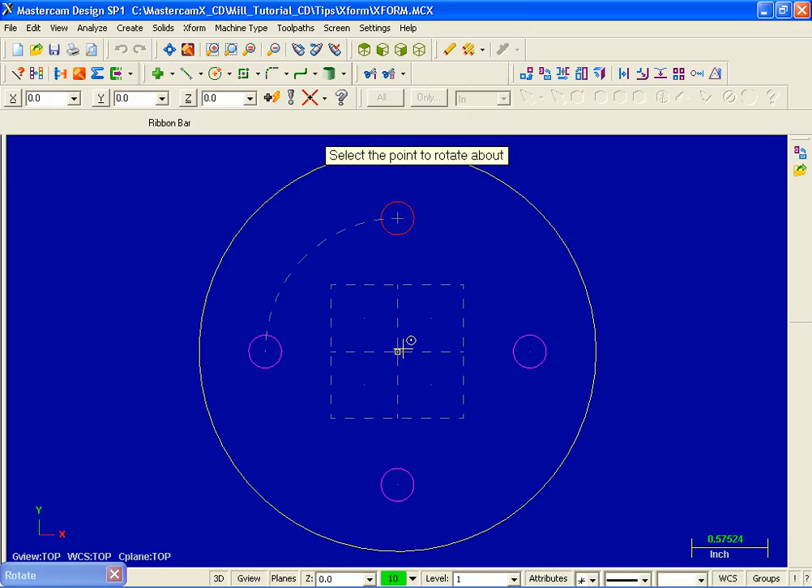Now we were doing a rotate where the center point was the origin, the x0, y0. Now if we have to pick another point, it's not a convenient situation like this where we have the center at x0, y0. Let's click on this button to define a new center point. Now the prompt, select the point to rotate about. As I move to the center of this arc, you can see there is a visual cue there that I'm going to snap to the center of this arc. So I'm going to pick it.

Everything's good here. I'm going to move on down to the bottom of this dialog box and hit the green check mark for OK. I'm just going to slide up now to the toolbar icon for clear colors and hit it. Now before we move back into Xform, what I'm going to do is undo this rotate operation. Now let's go into Xform, and the next thing that we're going to check out is Xform Mirror.

Now my first prompt is select entities to mirror. I'm going to pick this small circle, and that's it. To move on to the next stage, I'm going to move up to the right and click on the green button for end selection. Now what I'd like to do is mirror this small circle about the x-axis. Now moving up to the top of the mirror dialog box, the radio button is turned on for copy, so we're going to keep our original geometry, and what I'd like to do is mirror about the x-axis. So I'm going to turn this radio button on.

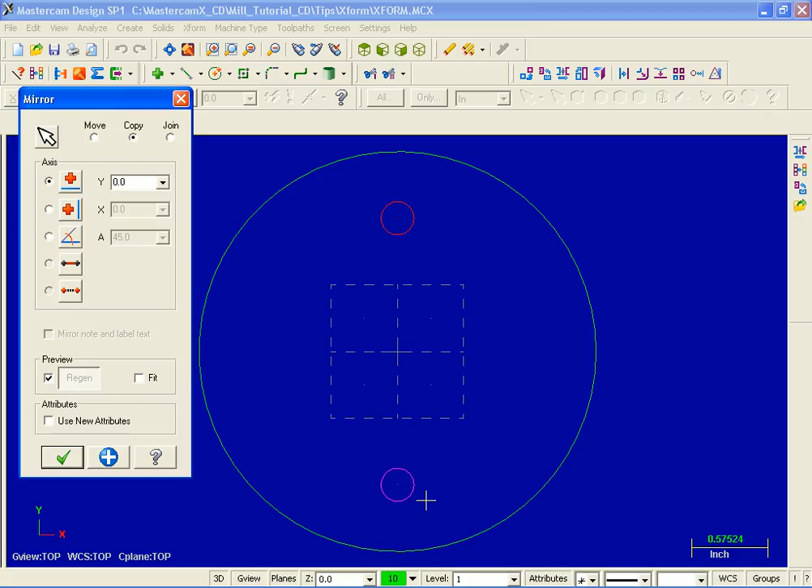Now just below, some of the other options are to mirror about the y-axis. Down below we can mirror about an angular axis. We can also select a line in the graphics window to mirror about, and at the very bottom we can mirror about 2 points. Now as my preview is turned on, you can see the result of this mirror operation, and everything looks good here. I'm going to go over back to the mirror dialog box and click on OK. Now before we move on to the next function, I'm going to hit undo.

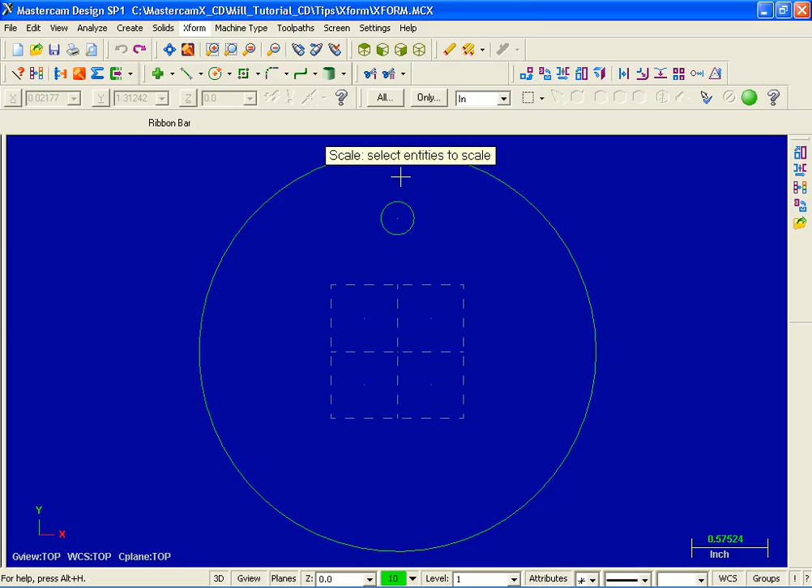Let's go into Xform, and this time I'm going to select Xform Scale. Now the first prompt, select the entities to scale. What I'm going to do is draw a window around these entities. So I'm going to pick a point and drag to the right and down and then pick. And as you can see, I've selected these 2 entities. Now let's move on to the next step. I'm going to pick end selection.

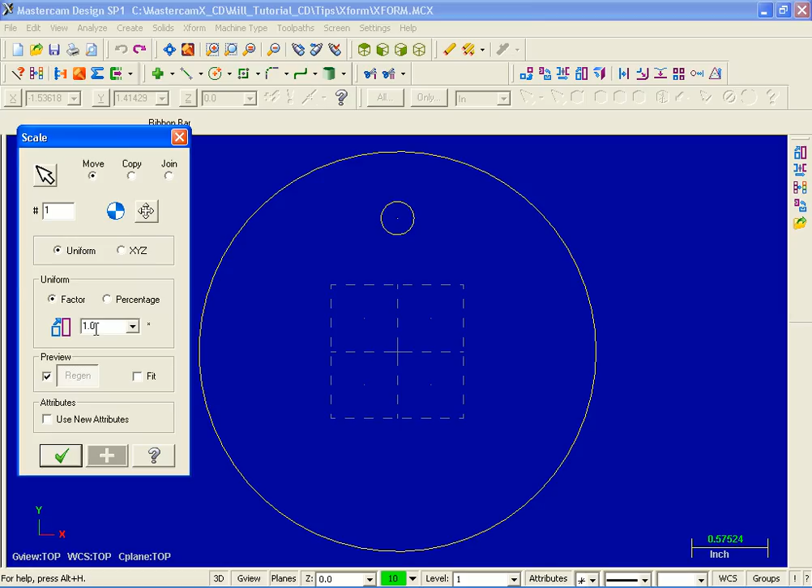Now over on the left in the scale dialog box, you can see we've got the radio button on for copy, to keep our original geometry. But what I'm going to do is slide off to the left and turn on move. I'm going to delete the original geometry. Now as we move down, we've got the number of items set to 1. I'm going to leave that as is, and down below in the scale factor we've got it set to 1. What I'm going to do is change it from 1 to 0.5, half scale, and then hit enter.

Now our preview is turned on, and on the right in the graphics window we've scaled down our geometry. I'm done here. I'm going to pick OK. I'm also going to move up and pick undo.

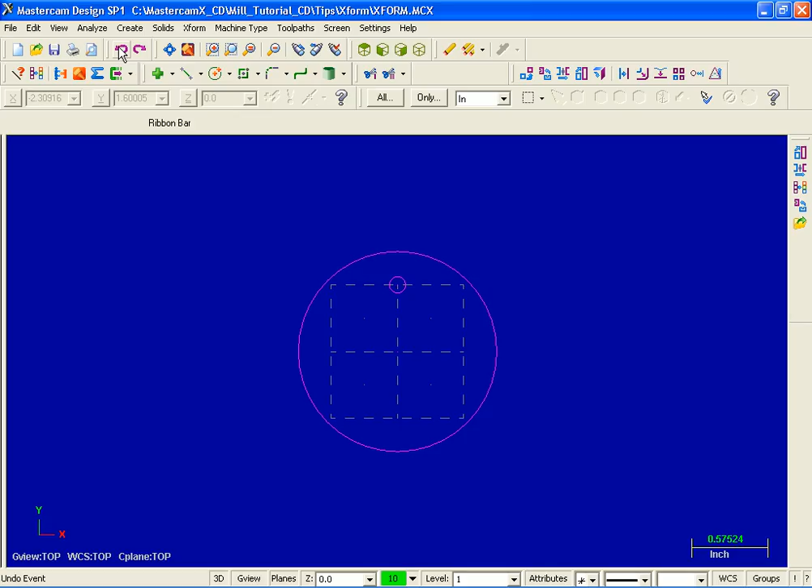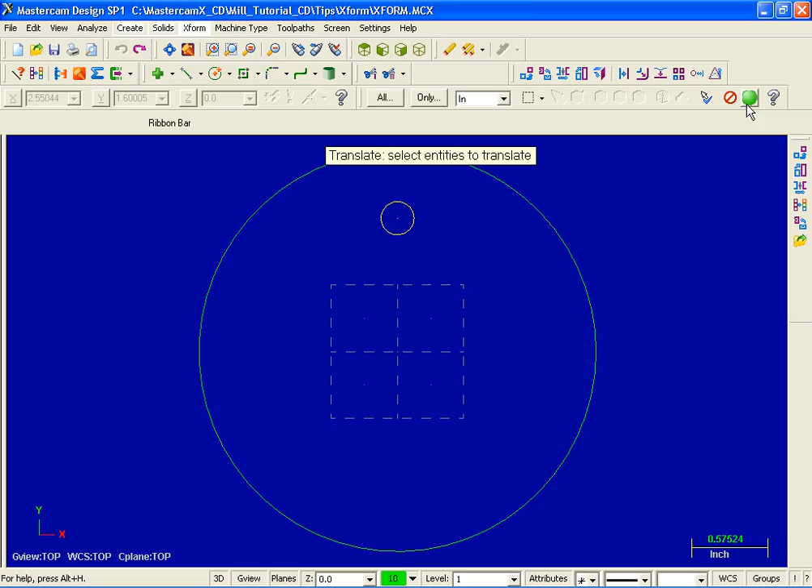Let's go back into Xform, and this time right at the very top we're going to check out Xform Translate. I'm prompted to select the entities to translate. What I'm going to do now is pick this circle. I want to move on to the next step. I'm going to click on End Selection.

Now over on the left, copy is turned on, so I'm going to leave that as is. Number of items we're going to copy is 1. Down below in the delta XYZ section, I'm going to click in this white space for the Y value and input -1 and then hit enter. Now as preview is turned on, you can see over in the graphics window I've just translated that circle down

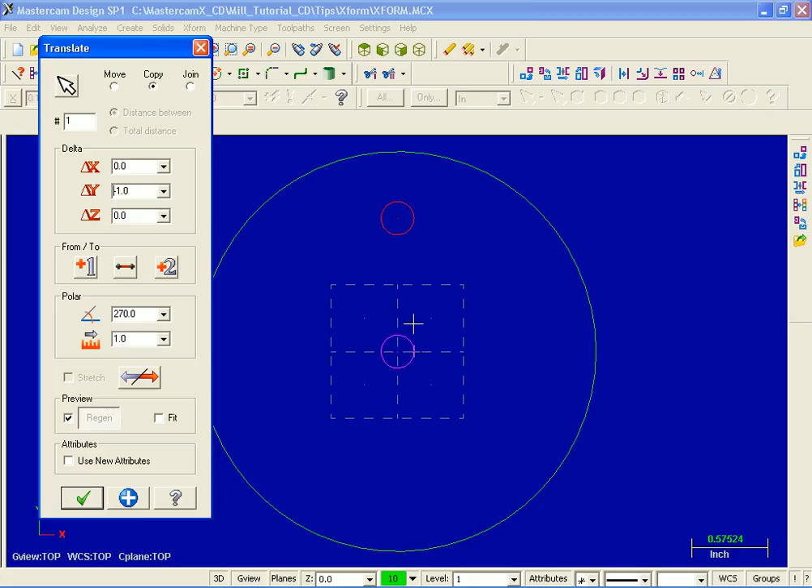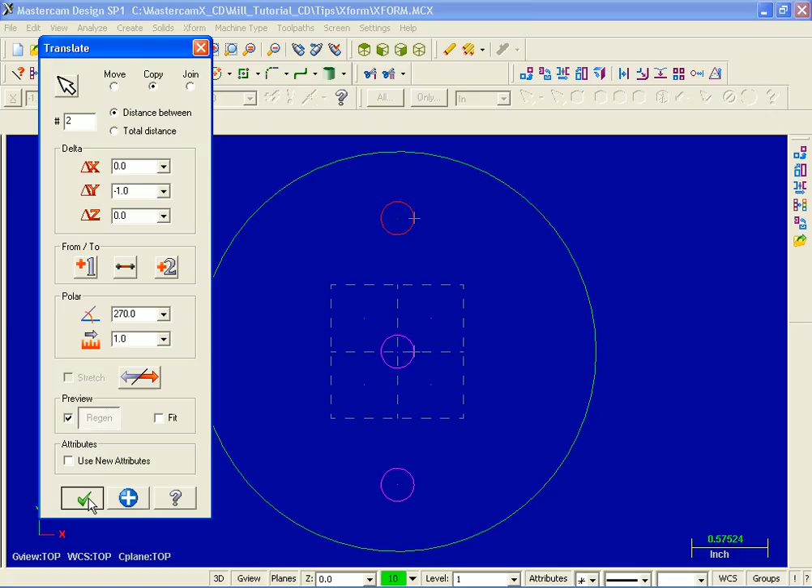in Y -1. Now let's move on back, and for the number of items I'm going to change that from 1 to 2 and then hit enter. So here's our second item, and these circles are 1 inch between centers. I'm finished here, so I'm going to click on OK. I'm going to also move up and do an undo.

Let's go back into Xform, and next we're going to check out Xform Offset. Now the first prompt, select the line, arc, spline or curve to offset. What I'd like to do is offset this arc, so I'm going to pick it, and the next prompt, indicate the offset direction. I can pick outside or inside, so I'm going to pick inside.

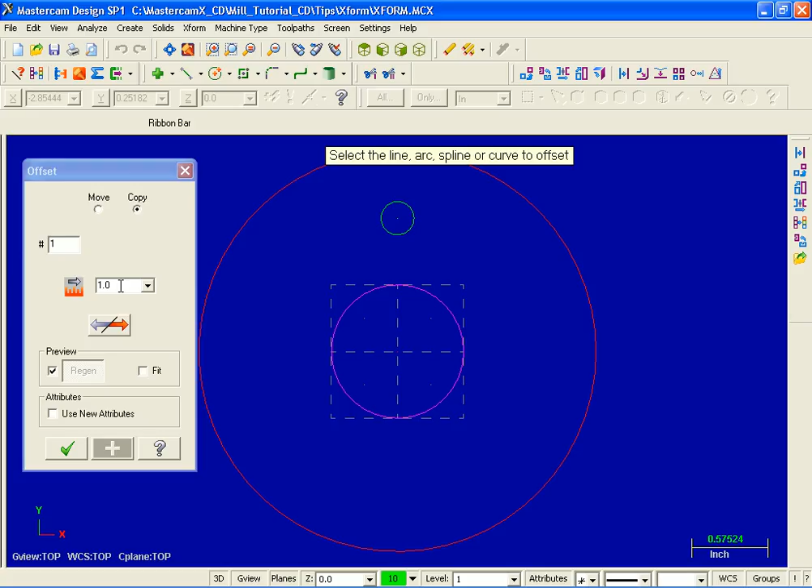Now if we move over to the left in the offset dialog box, the distance is presently set to 1 inch. That's our offset distance. I'm going to change it from 1 inch to 0.5 and hit enter. Now just below distance is the direction button. I'm going to pick on it, and as you can see it's flipped over to the other side. I'm going to hit it again, both sides, and I'm going to hit it one more time.

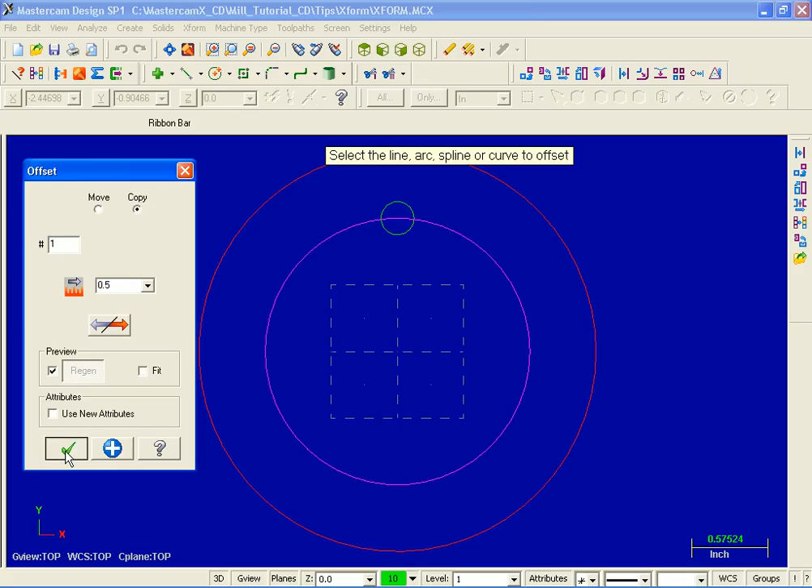So the distance, the offset distance, is 0.5. I'm done here, so I'm going to pick OK. I'm also going to go up and do an undo, and just slide off to the right and click on Fit. Now I'm just rotating the wheel on my mouse.

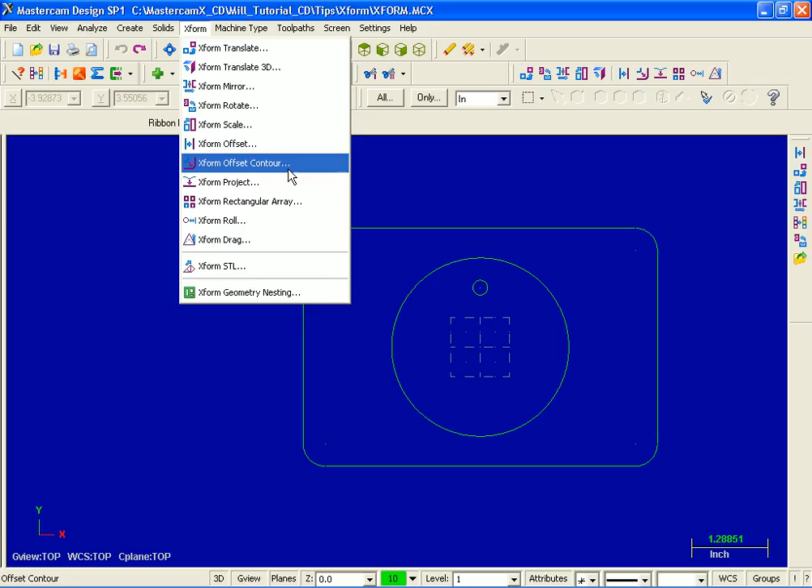Let's go back into Xform, and we're going to check out Xform Offset Contour. Now the first prompt, select chain 1. What I'm going to do is select this horizontal line. I'm going to pick it, and as you can see highlighted in yellow, it's successfully chained the geometry. I'm finished here, so I'm going to move over to the left. At the bottom of the chaining dialog box I'm going to pick on OK.

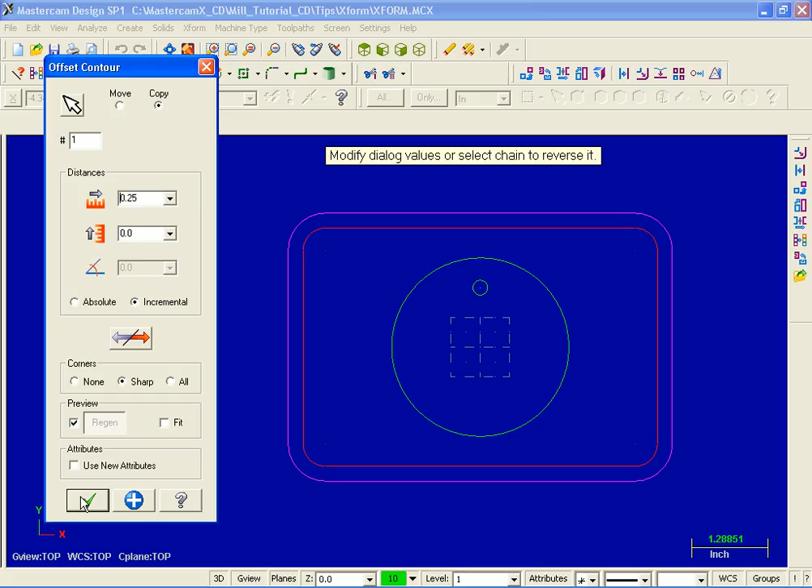Now at the very top we have the radio button turned on for copy. I'm going to leave that as is. As we slide over to the left, the number of items we're going to copy is set to 1. Now down in distance it's set to 0.5. I'm going to change that to 0.25 and hit enter, and as you can see there's our new magenta chain with the offset at 0.25. I'm going to pick OK and then move on up and do an undo.

Let's go back up into Xform. The last thing that we're going to check out here is Xform Drag. Now I'm prompted, select entities to drag. Well, what I'm going to do is move on up and open up this drop down and pick window, and if I just slide to the left and open up this drop down, I'm going to pick in plus. Now Window In Plus selects entities that lie completely inside and entities that intersect the window.

So what I'm going to do is draw a window starting here and then moving on down to the right and pick a point here. And as you can see, it's picked these entities highlighted in yellow. Now to move on to the next stage, I'm going to click on End Selection. Now on this ribbon bar, the first thing I'm going to do is turn on Stretch. I'm going to slide over to the left, and I'm also going to turn on Move.

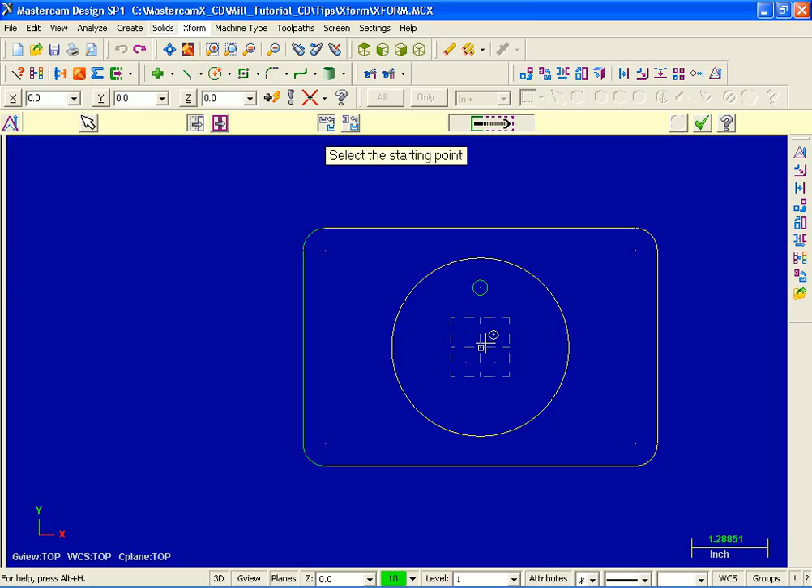Select the starting point. So what I'm going to do is move on down and pick a point here, and then pick another point over here. Now I'm done here. I'm going to pick on OK in the ribbon bar, and we've stretched those entities. Now let me undo this operation, and let's go back into Xform and do another Xform drag.

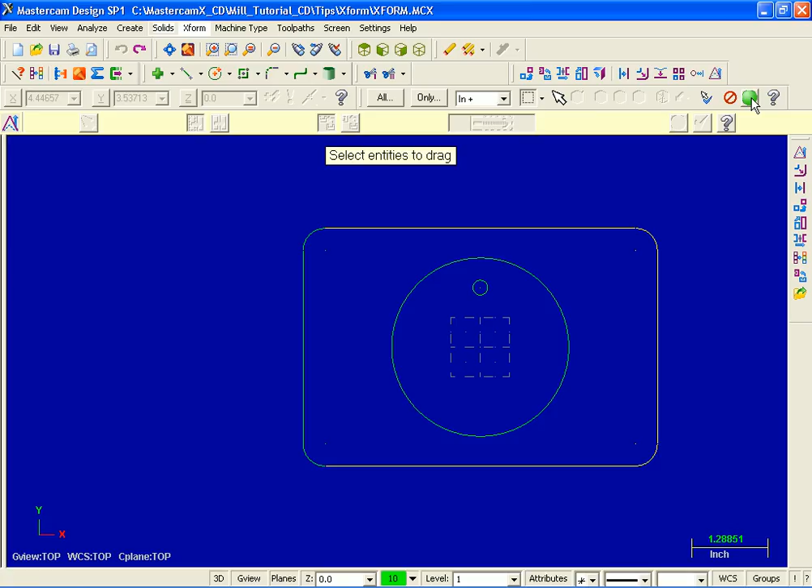Now I'm prompted to select these entities, so I'm going to draw a window just like I did before. Now to move on to the next stage, I'm going to hit End Selection. Again, I'm prompted to select the starting point, so I'm going to move on down and pick the same point as I did before. And for this next point, what I'm going to do is move up to the ribbon bar, click in the X value and type in 2.

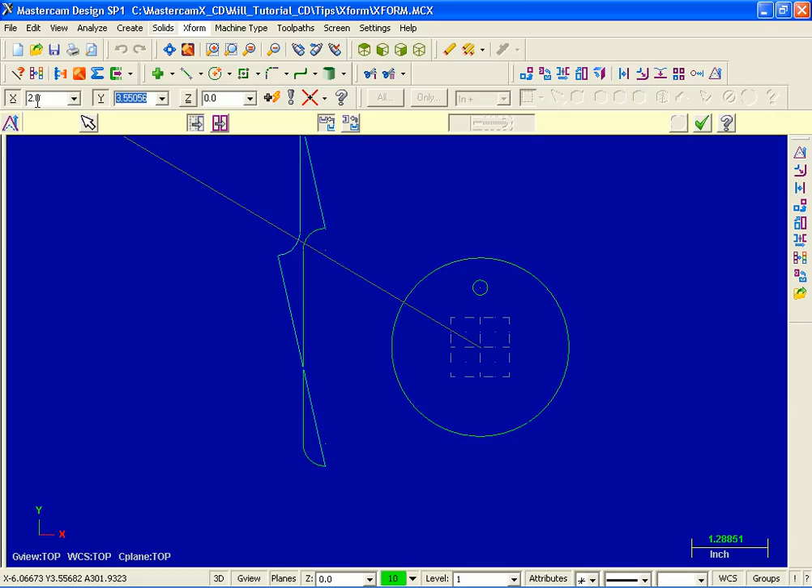I'm going to hit the tab to move on over. I'm going to input 0. I'm going to hit tab again and then hit enter. And what I've done is stretched these entities 2 inches in the X. Now I'm done here. I'm going to move up to the ribbon bar and pick OK. And that completes our tour of Xform.